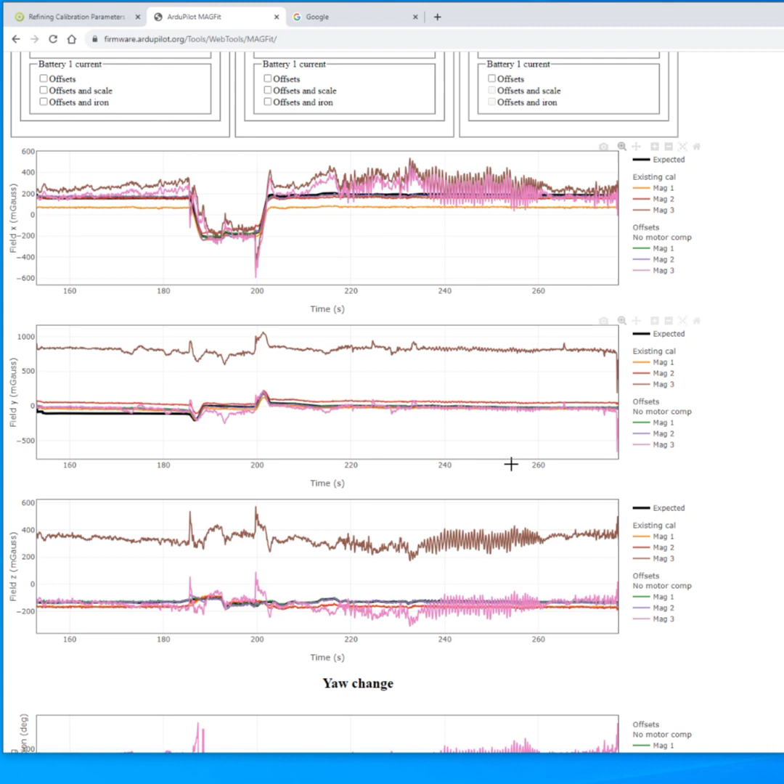So you can see we've got an external compass that we're using, second external compass that we're using, and then an internal compass that we're not using but is healthy. And you'll see there's lots of ticky boxes and some plots. So first of all, the plots. So we've got the field strength in X, in Y, and in Z. So this is the measured body frame magnetic field. And there's quite a lot going on here, so I think I'll just turn off some plots. Let's turn off these ones, much like the filter review tool, there's ticky boxes that you can go and tick.

So this is now just for the first compass. So you can see in black we've got an expected magnetic field, so it takes the vehicle's attitude and the vehicle's location and looks up the expected magnetic field in the world magnetic model. So that gives us this black expected line, and then the existing calibration here is in orange, so that's what the vehicle is flying on.

And then we've done a calibration here just using offsets, and that's in green. So by this fit, we've gone from the orange up to the green here. And you can see that's the same in X and Y and Z in all three axes. The green fits a little bit better than the orange. You see nicely on the line here. They're both a bit high to begin with, and then Z again, we're fitting reasonably well there.

So you can see the existing calibration, what we've come from, and then what we would get if we leave this offsets selected. Then there's a change in yaw. So this is if we were to go from the old calibration to the new calibration, what heading change would there be? And in this case, we're getting quite a big change, which suggests that the existing compass was perhaps having a bit of a bad time. So you can see 30 degrees change about through the whole flight.

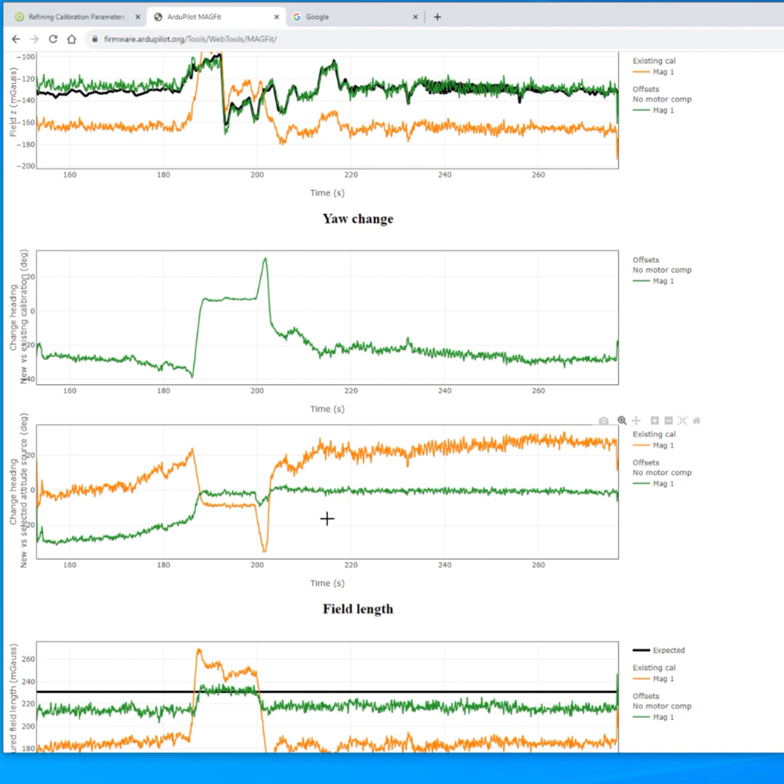So that's that, and then it plots the expected field length, so the sum of the x, y, and z axes is in black here, which of course doesn't matter what orientation you're at, the total length of the vector is the same. And again, you can see the new calibration has moved us up a little bit closer to that expected length. And then this is one of the available motor compensation sources. So in this case, it's battery current.

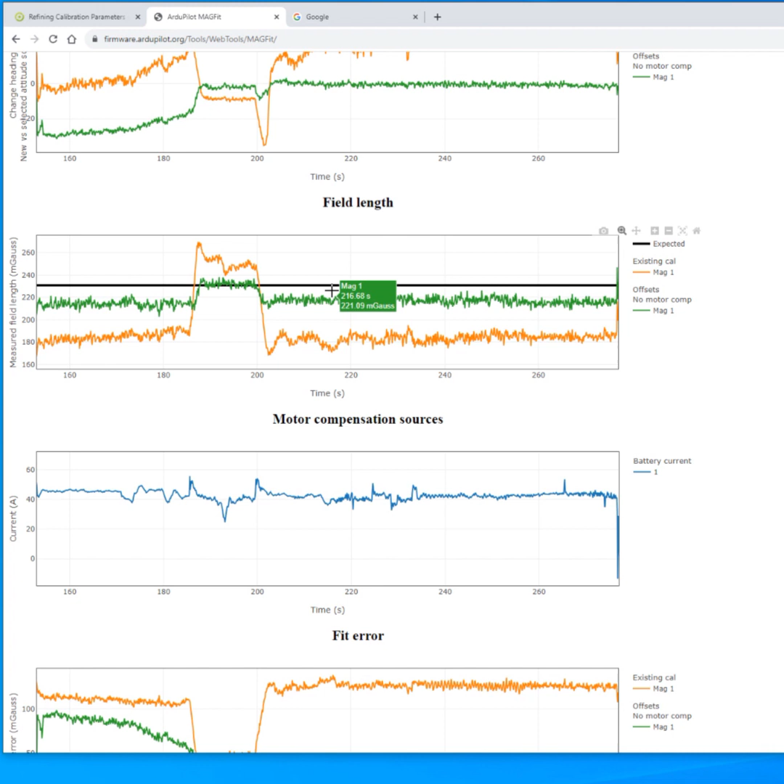And if we saw a big spike in this plot, perhaps here, where there's a spike in this length, we might go, oh, it would be worth switching on current calibration there. But in this plot, I can't really see there's any correlation between the error here and this source of interference. So it's probably not worth doing a battery current compensation on this particular log.

There's a fit error, so this is just how well it was able to fit throughout the duration of the log. You can see it was a bit worse at the beginning of the log, and then it's got quite a low error for the rest of the log. And then this sort of bar graph is just the area under this curve. So the existing calibration is a big number, and then the offset no motor compensation, which is the calibration we're looking at here, it's got a lower number, 31 is the error for that.

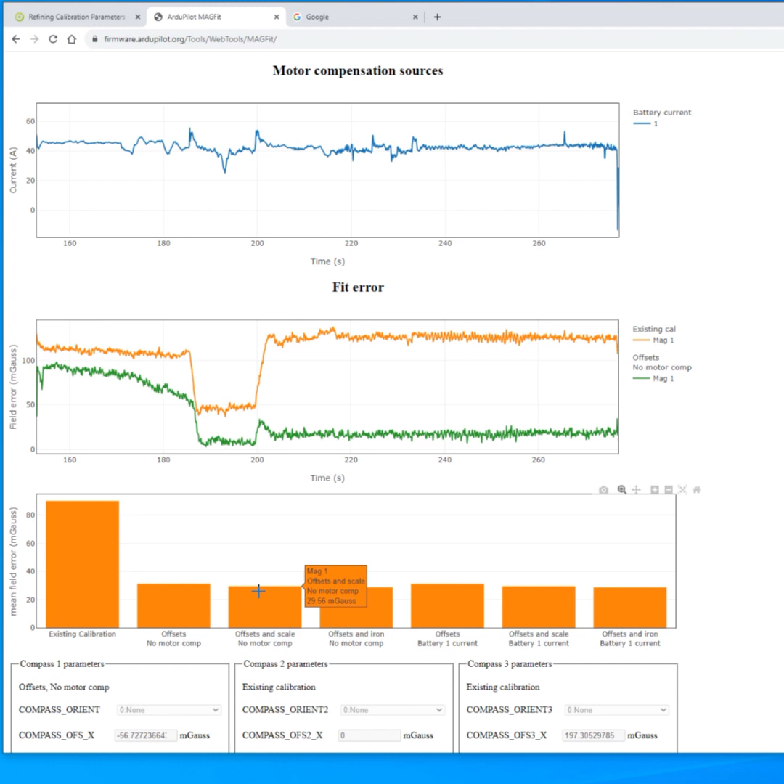And it also does a number of other calibrations. So if we go back to the top here, you can see all the other options in here. So we've done, in fact, 6 calibrations here, and you can pick which one you would like to use. And we see there's very little difference between all of these, which is a good sign if you can fit with the minimum possible number of parameters.

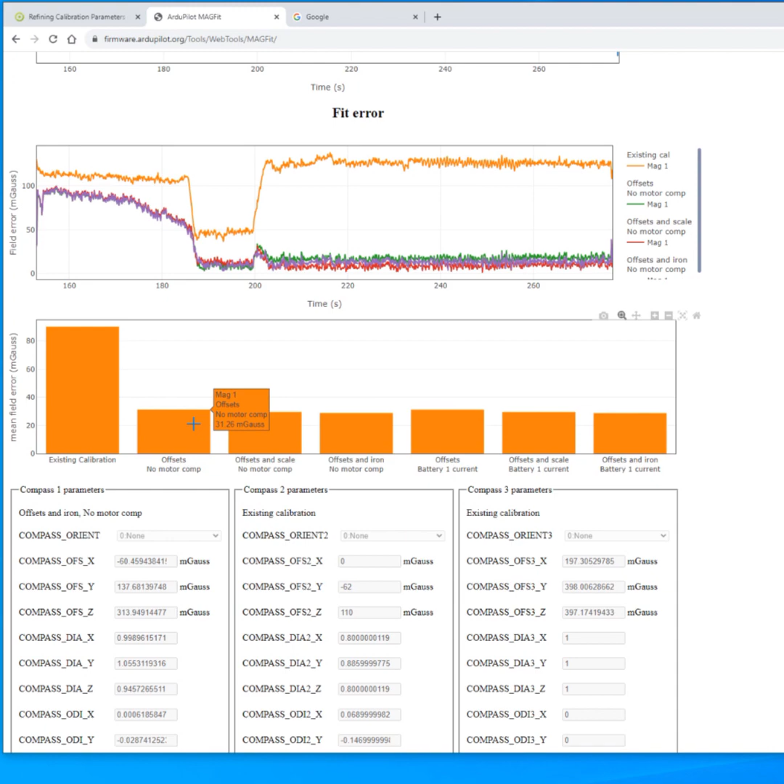So you can see that's reflected in these errors. So there's not any massive improvement here in fit by including extra parameters. So what we would probably do for this log is just leave it with just the offsets calibrated.

So that is that. If we go and look at perhaps this internal compass, first of all, you'll see I actually can't select some of these more complicated fits with a higher number of parameters. And that's because it did the fit, but the parameter values it got were nonsense. So it said, I tried to calibrate it, but I can't. So you actually can't select those ones. So we just get the offsets here. So that's just bringing the individual axes in line.

The increased parameter fits add a scale factor, so that just scales all the vectors, and then the offsets and iron does the hard and soft iron compensation matrix.

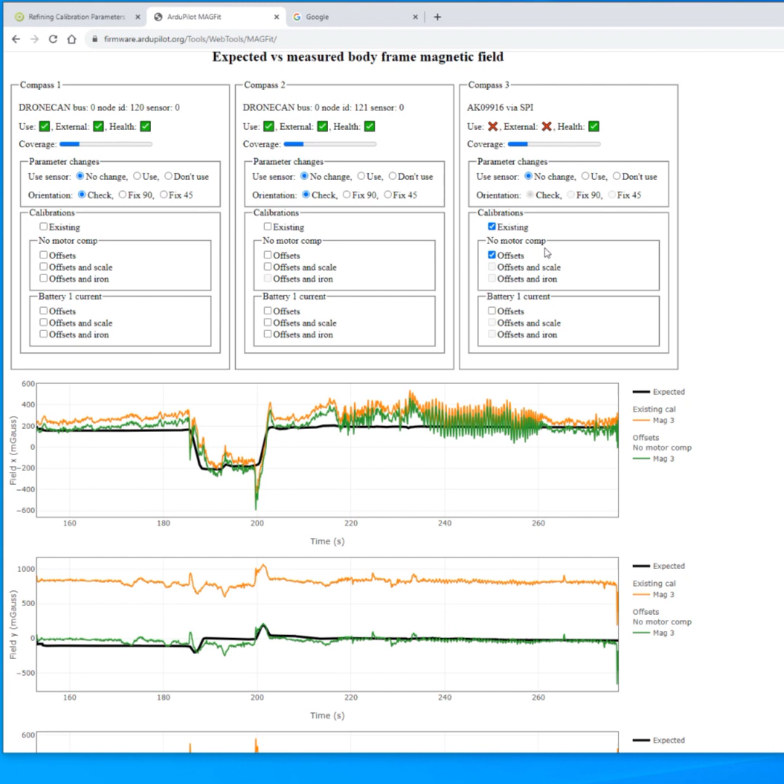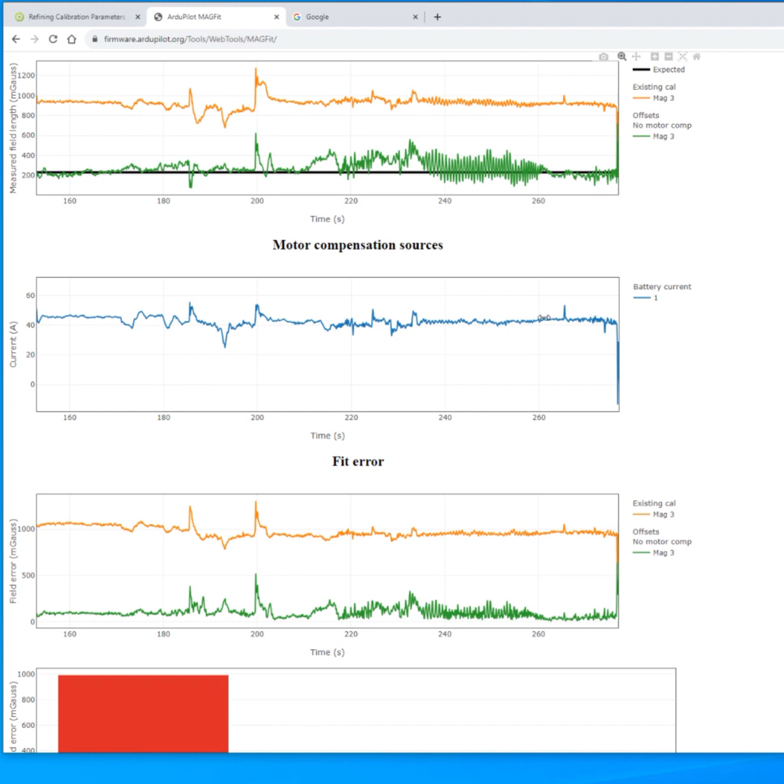So on this compass, I thought we might see a little bit more correlation between the error and the battery current here, right? And I think if we zoom in here, you can see all spikes here up and down. So on this internal compass, and certainly at the beginning and end, it's really clear. You can see it spikes up, follows current quite closely, and then drops down again. So it's extremely clear on this internal compass that there's a very strong interference from the battery current here.

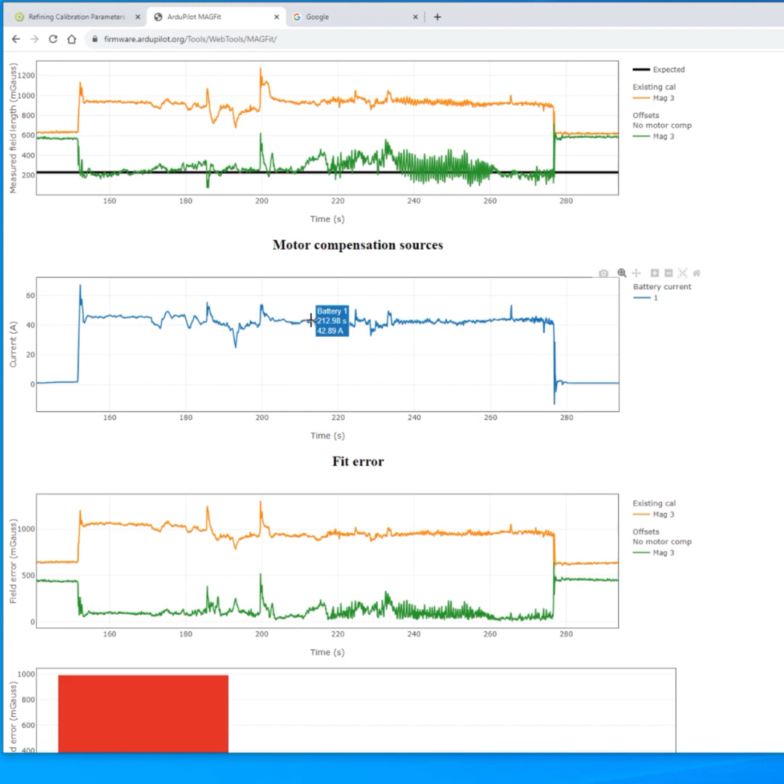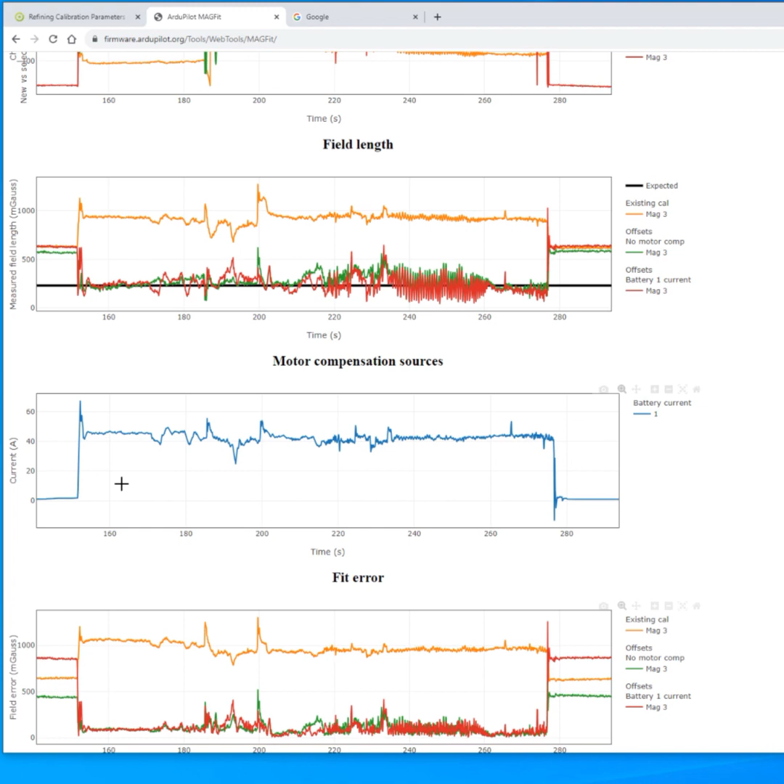So we can select a fit with battery current compensation. And you can see that's done a little bit better. So we've gone from big error at the beginning of the flight to a bit less error in the middle, but it's still really not an acceptable compass to use. You can see we got about 30 on the external compass as the error for the whole flight, and here we're getting 150. So even with the current compensation, still not a good idea to use this third compass. So whoever set this up was correct in not using that compass.

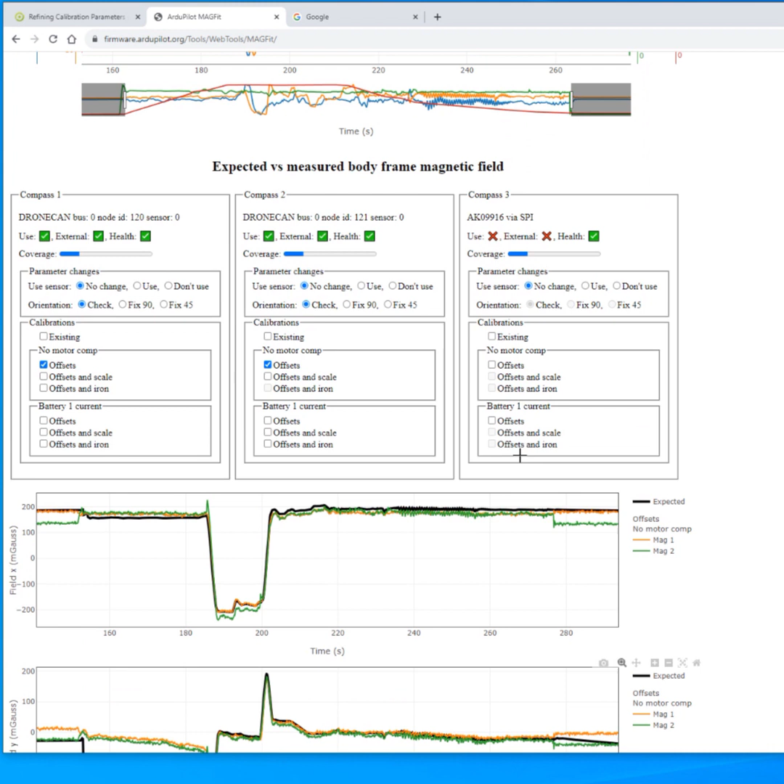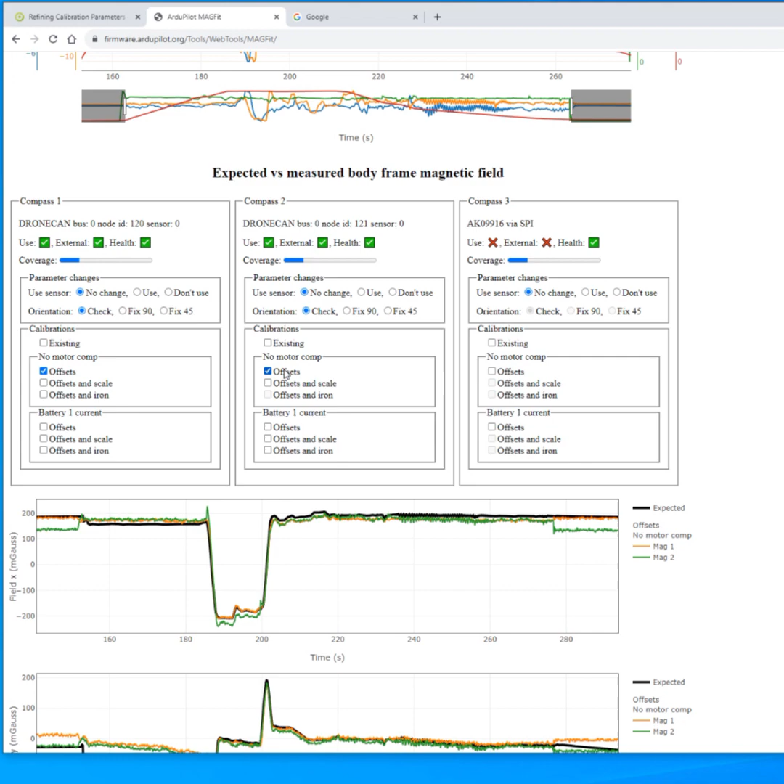So we would continue using these first two, I think, in this particular log. So I've selected offsets here. We haven't actually selected this third compass at all. So because these are the last two I had ticked in this box, if we now go right to the bottom, you'll see it's populated those calibrations in the little parameter display here.

So you can't change these numbers. These are just from the calibrations. And it says here what it is that it's displaying. So this is the offset calibration. There's no motor compensation, which is the same for compass 1 and 2. And then it's actually the existing calibration. We haven't got anything selected for the third compass. So if I hit save parameters, it's telling you what it saved. It saved compass 1 offsets, no motor compensation, compass 2 offsets, no motor compensation. I hit OK. It's downloaded a file, and that's our parameters.

So it's got the offsets, the diagonals are 1, the off diagonals are all 0, no motor compensation, scale of 1, compass orientations there. And you can see the same for the second compass, and we've turned off the global motor compensation parameter. So you could then just take these params and load them onto your flight controller, and that would be your compass calibrated from this MAGFit.

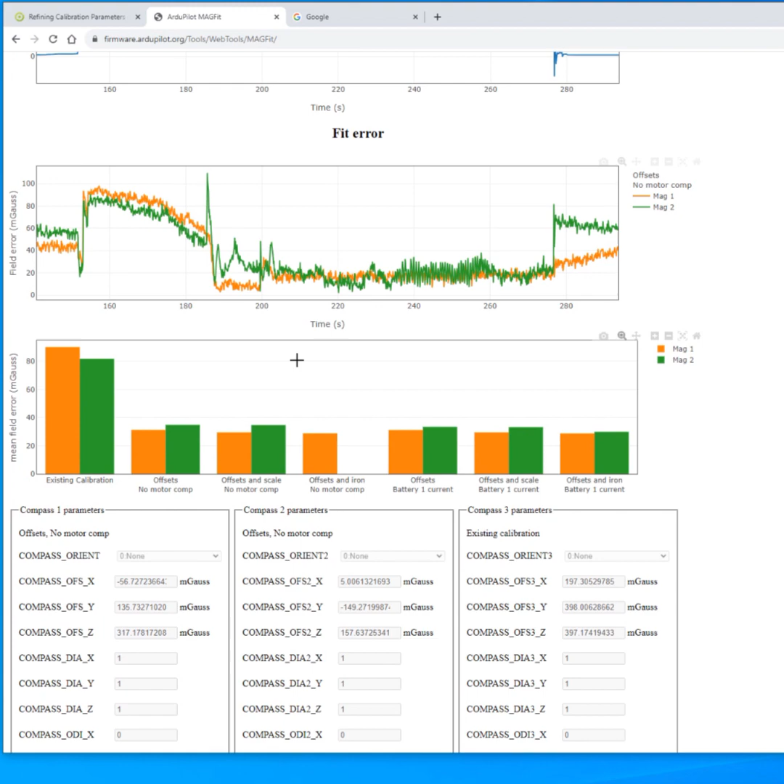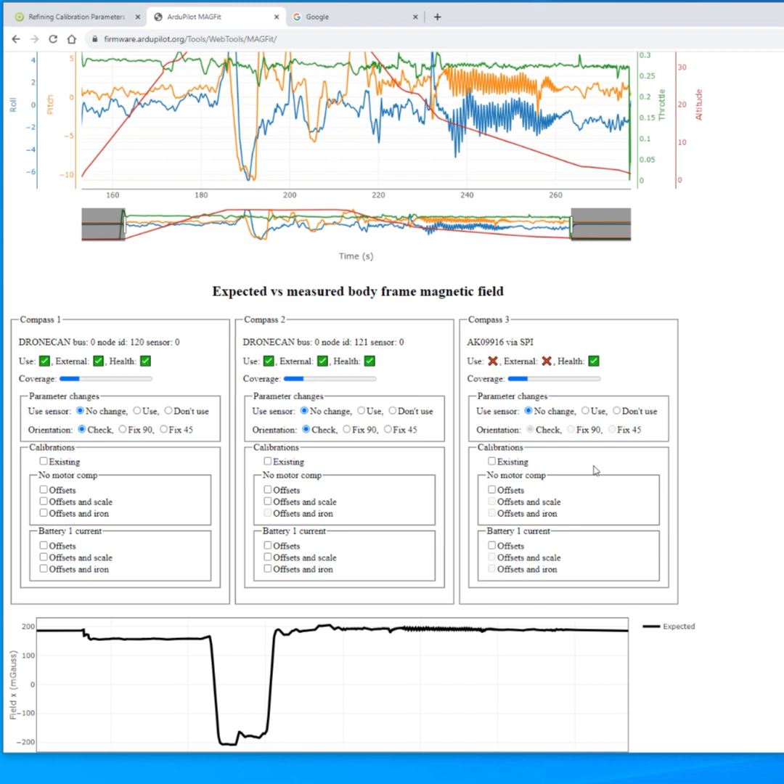So that's a basic overview. I think the key thing is you don't want to rush into the really complicated motor compensation and scale and iron correction if there's no real benefit. So let's have a look at another log, and we'll have a look at some more of these options here. So let's clear that, and then let's have a look at this long flight here. It's a bit of a longer log, so it's going to take a little while to load.

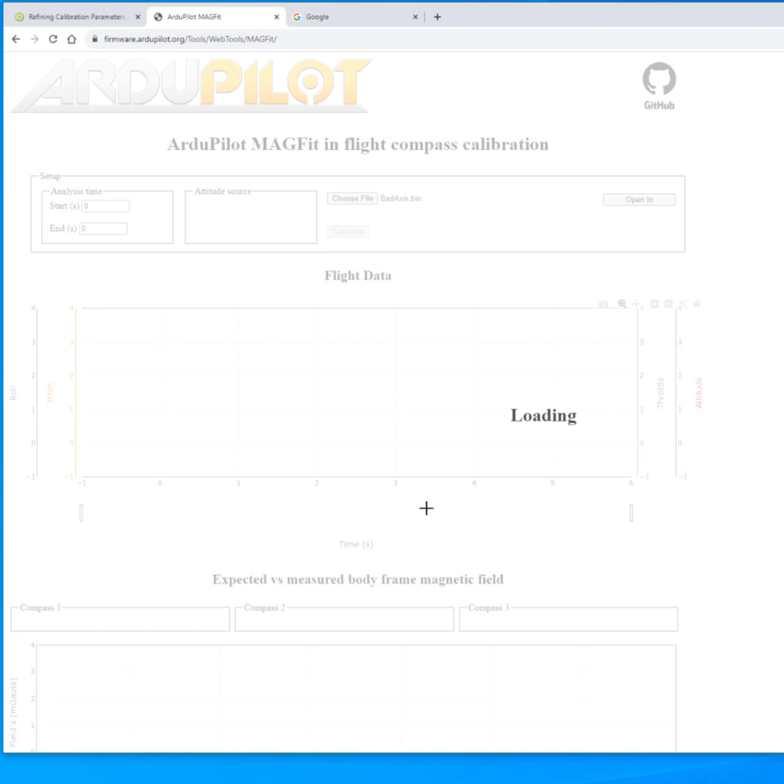So you'll notice it says MAG1 possible incorrect orientation, 0 none, should be 12, pitch 180. And it says it's got a cost ratio of 4.8. So that means that this pitch 180 rotation is 4.8 times better than the next orientation. So we're just going to say okay, and it will carry on.

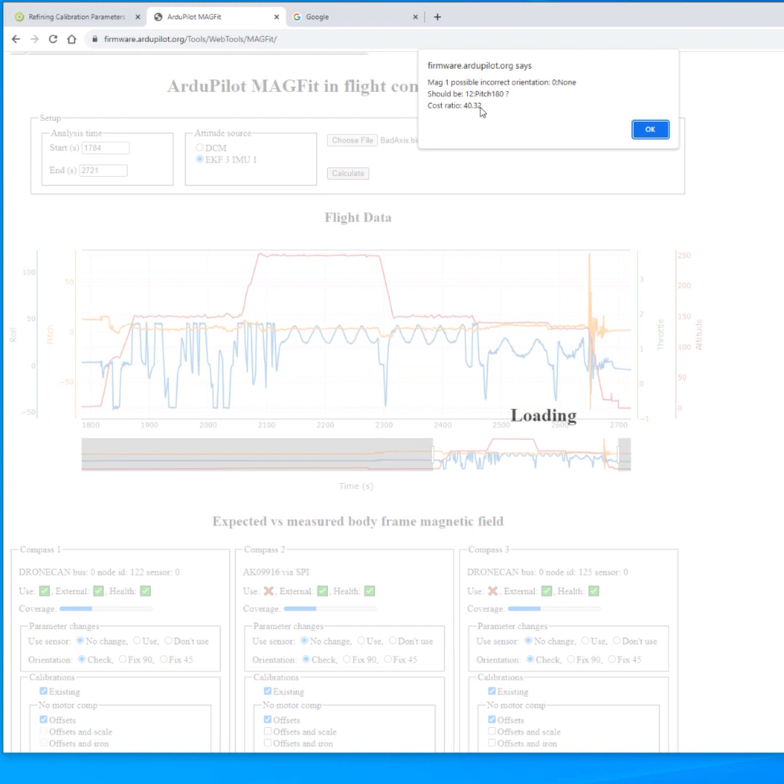So in this particular log, I think it had disarmed logging turned on. So there's a big long chunk at the beginning of the log. So we'll just zoom into the end here, and I'm just going to recalculate. And again, it's warned us the same warning. But now we've excluded that beginning of the log. You'll see this cost has gone up to 40 times. So it's really very sure that this pitch 180 orientation is correct.

And we can go and look. I'll just turn off the second and third compass here, just so there's a bit less going on, and we'll turn off the calibration. So it's very clear here that the lines are not even close to matching. They're actually going completely the wrong way in the x-axis, y looks okay, and then the z-axis is wrong. So it's very clear something's wacky here. So what we can do is this little parameter changes box.

So under orientation at the moment, check is selected, which is what is selected by default, which means it warns us. And it said pitch 180. So if we select fix 90, it will fix to the closest 90-degree orientation. Obviously you've fitted your compass to the vehicle, and you know if it's a multiple of 90; if it isn't a multiple of 90, you can let it fix to one of the 45-degree rotations. But in this case, we know it was 90 degrees, so we're going to hit fix 90.

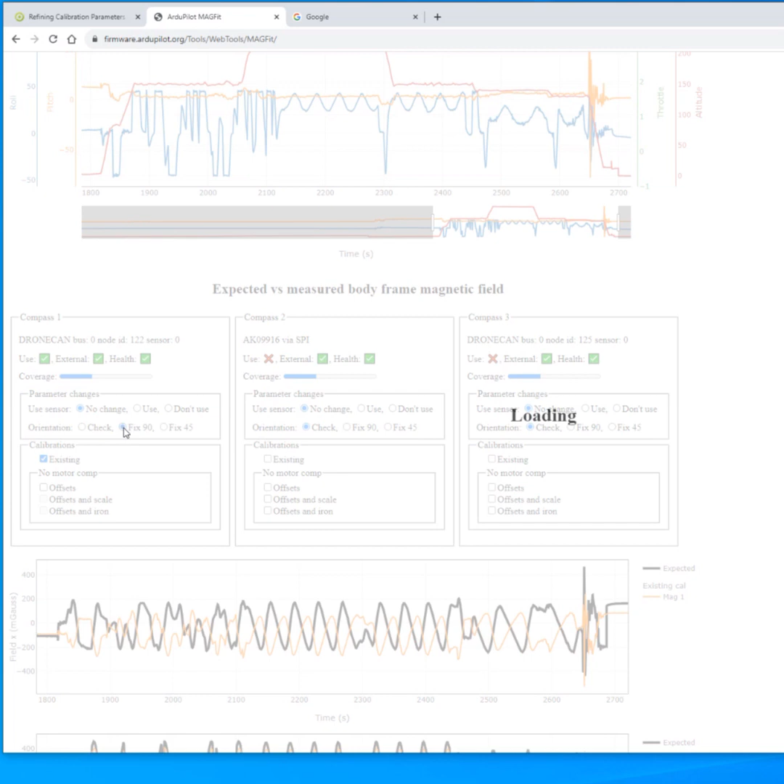It's going to run again. And now you'll see, of course, the existing calibration is the same. It's still got the wrong orientation. But if I just turn that off, and we'll turn off the other two compasses as well, you can now see by fixing that orientation, it's been able to nicely line up the X, Y, and Z. So it can fix orientations for you.

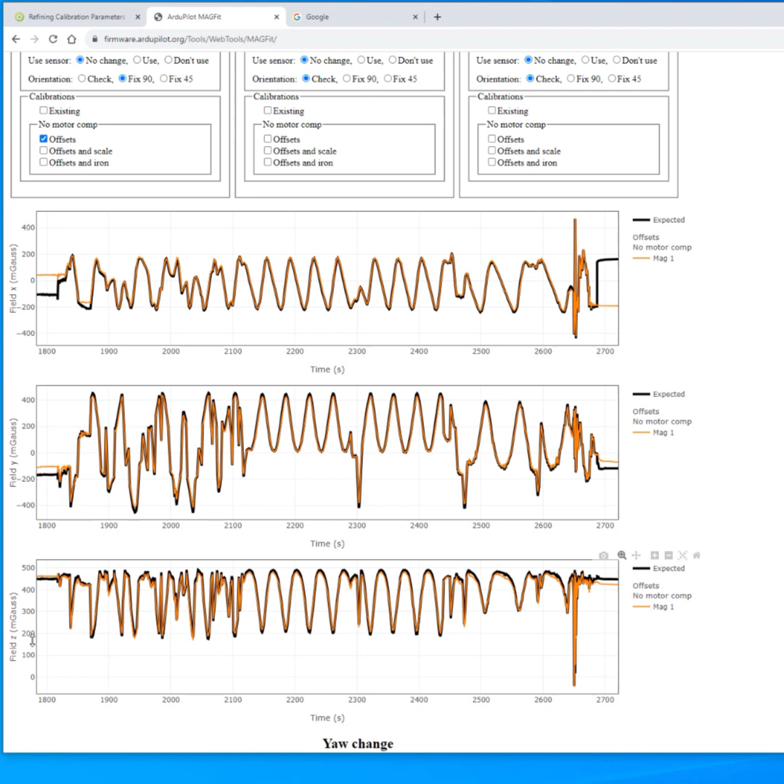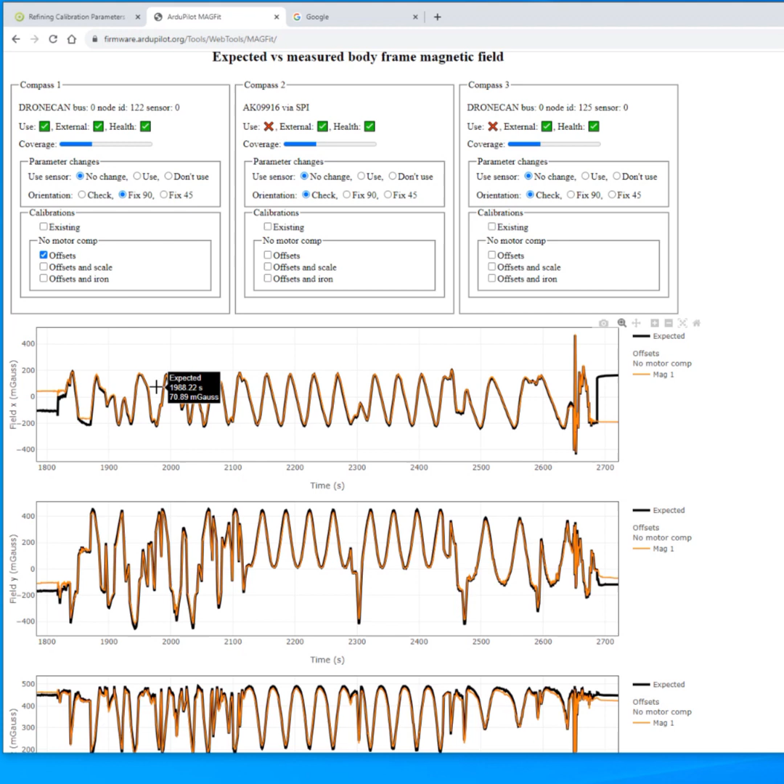Having said that, if you are flying the vehicle, this was quite a dodgy flight because it had the incorrect orientation. So if you're not sure, what you can do is fit the compass, but you don't select use. So it won't use the compass which you're not sure of the orientation. And of course, you do actually have to fly for this MAGFit, although the built-in compass calibrations will also correct orientations for you. So if you're not going to fly, you could just do an on-the-ground compass calibration.

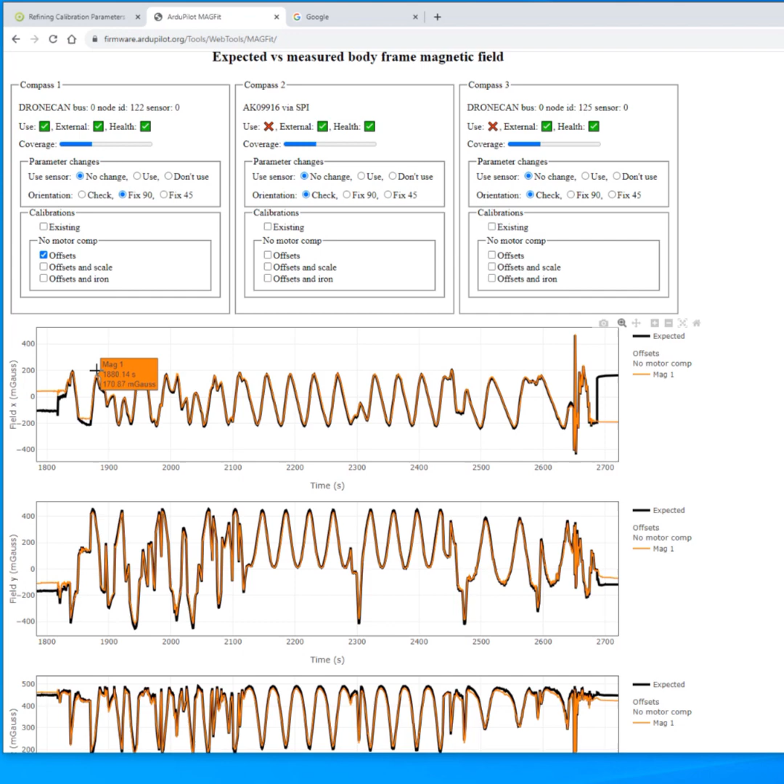So in this particular case, you can see it's fixed the orientation. It's got a much better calibration. Now, there's an extremely big change in yaw, and that's not because the new calibration is rubbish. That's because the old calibration was rubbish. So that's why we get this massive change in yaw here, and we know that the compass had the wrong orientation. So we go, oh, that's okay.

And you can see that because of that, the existing calibration in orange here also greatly disagreed with what the EKF thought it should be. And our new calibration is much better, within maybe 10 degrees. So again, that's another confirmation that the calibration is correct. And again, the field length was just all over the place. In this particular log, there was no current monitoring, so there's no compensation source. So we can't look at that sort of correlation there.

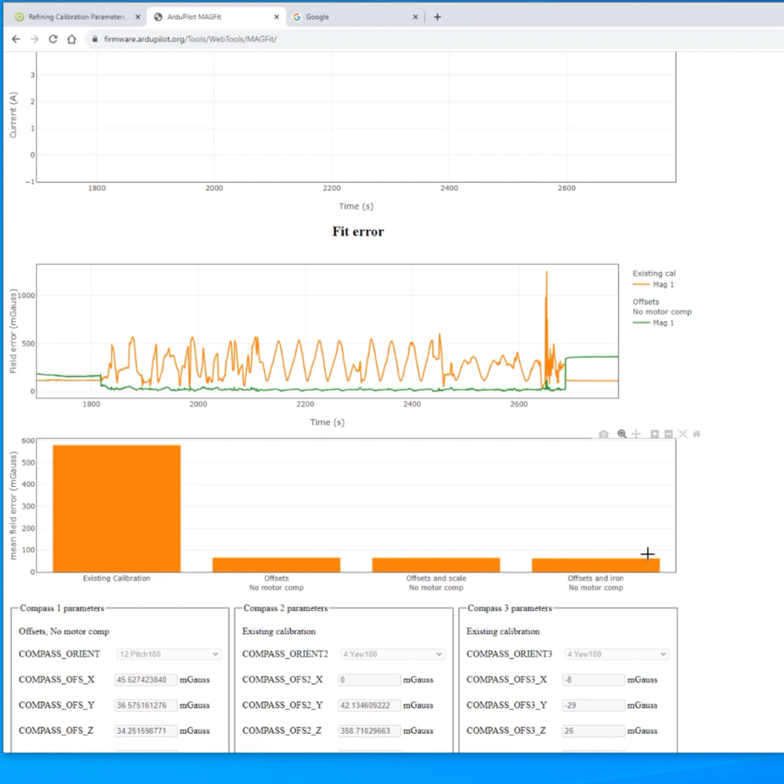And again, this is fit error, and we know that compass was completely wrong. And again, this is a log where we get about the same, even if we include the more complex dimensions in the fit. So probably here we would just set offsets. There's no significant improvement by including the extra parameters there. And I will also add that the length of the log shouldn't matter for these comparisons.

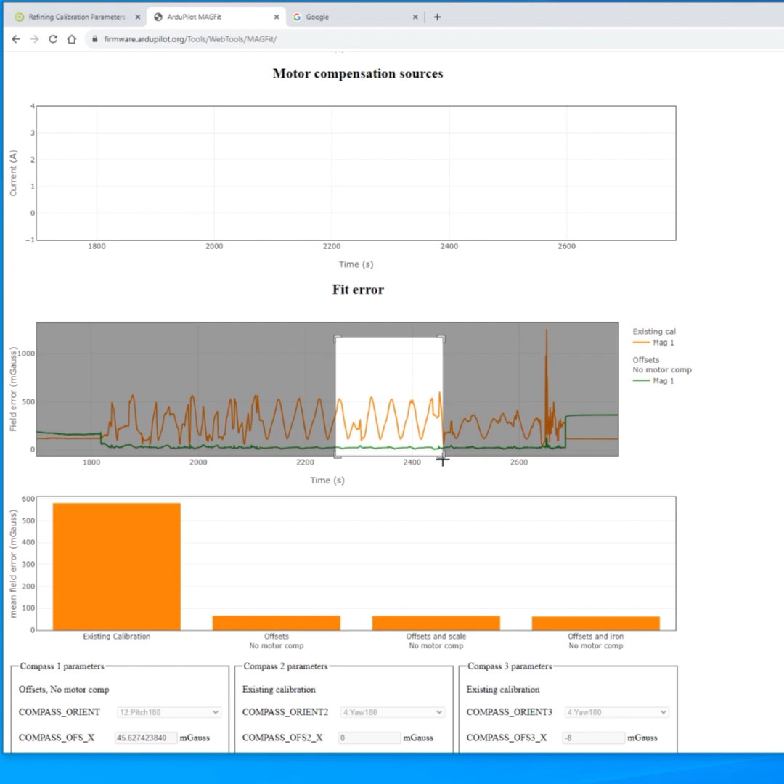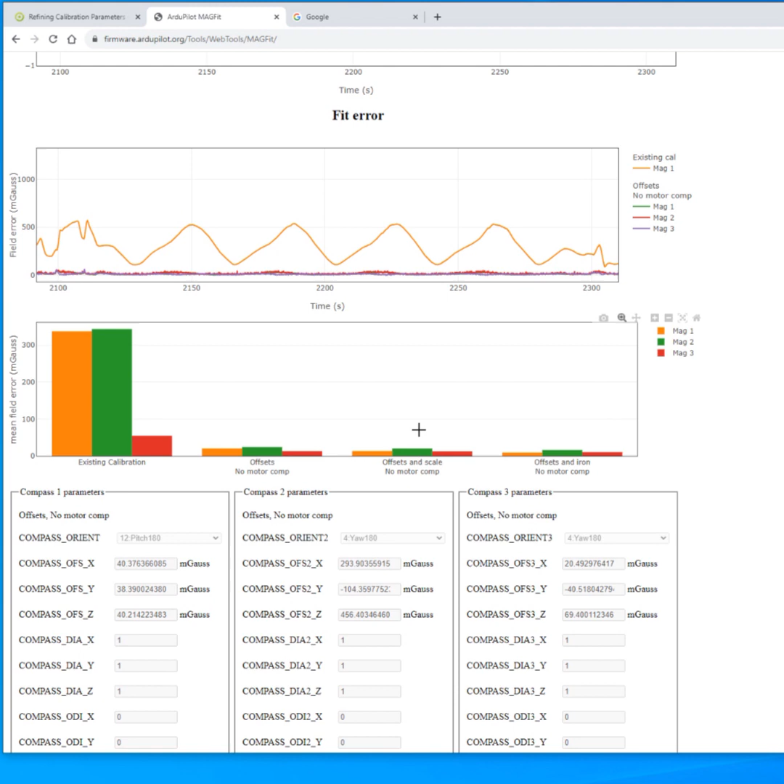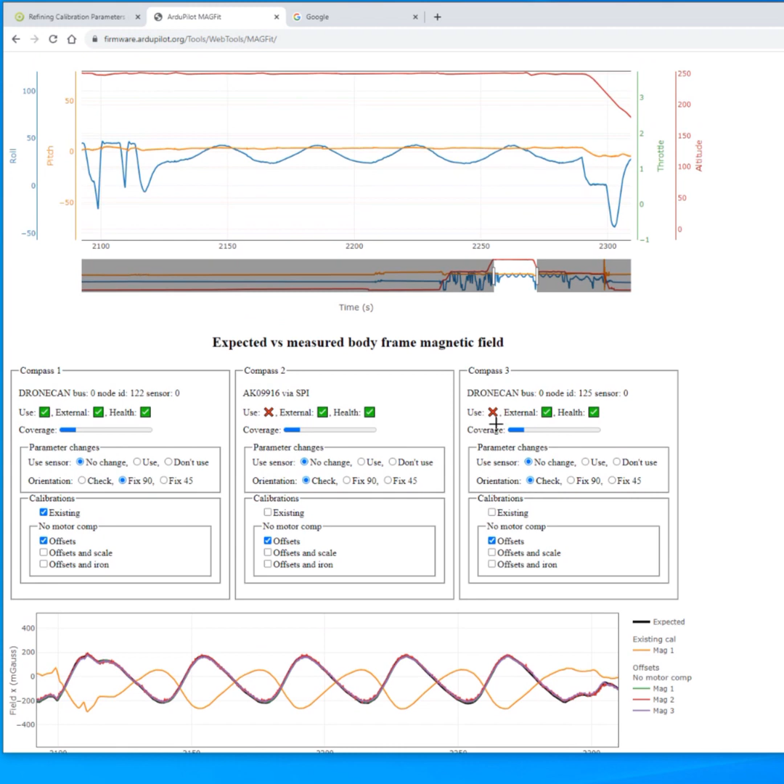So if we go to the top and zoom in a little bit, the error score should still be equivalent. Let's see, so it's a bit lower now. I mean, it's a bit hard to say. So it should still be comparable between flights, roughly, because it is normalized by the length of the sample. So that's that. Let's just go back to the beginning of the flight.

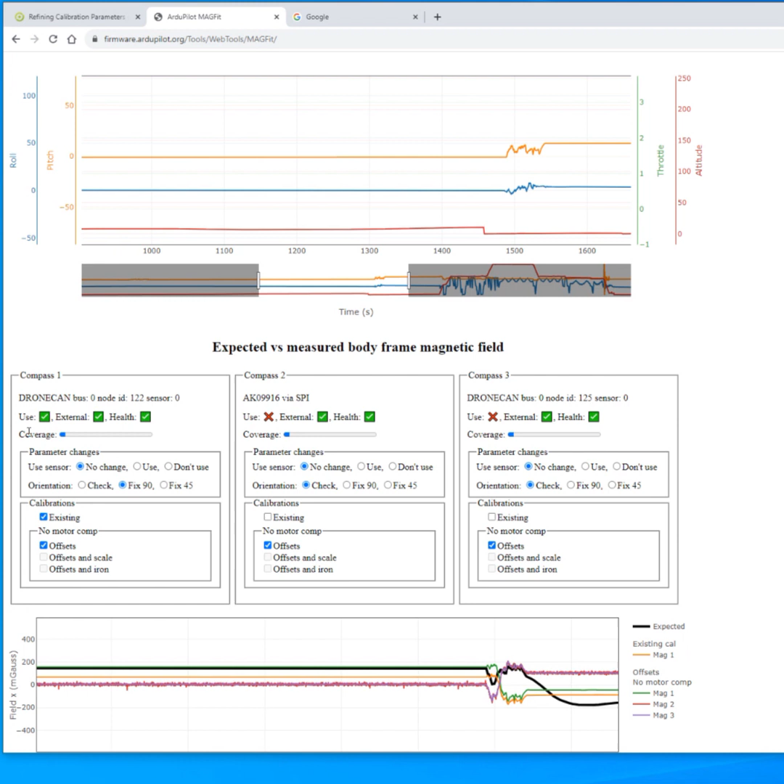If we hit calculate here, you'll notice this coverage bar. So we get a very low score in coverage. This coverage is trying to give you an indication of how good a flight it was for a MAGFit. So how many of the possible orientations did the flight hit? If we're just looking at the beginning of the flight where there's no movement, you'll see it gets a very low score. And we get obviously the same score on all compasses in this case.

But if we include a bit of the flight where there's actually some flying and we hit calculate again, you'll see that coverage score has gone up. And if we include the rest, we should see it gets a bit bigger again. So this is quite a good coverage. Now it is all possible orientations, and so that includes upside down and things like that. So you're probably on a flight not actually going to get more than maybe 40%.

This is actually one of the reasons why the compass calibration on the ground usually works really well, because you have to get 100%. It will not complete until you've done lots of orientations, including upside down. But in this case, from an actual flight, we're not expecting the upside down orientations unless you're a very ambitious flyer or you're flying acro or something. So we get 40%. But if you're struggling to get good results, or you've done a MAGFit and it was no better, it might just be because you had quite bad coverage if you didn't fly at enough orientations.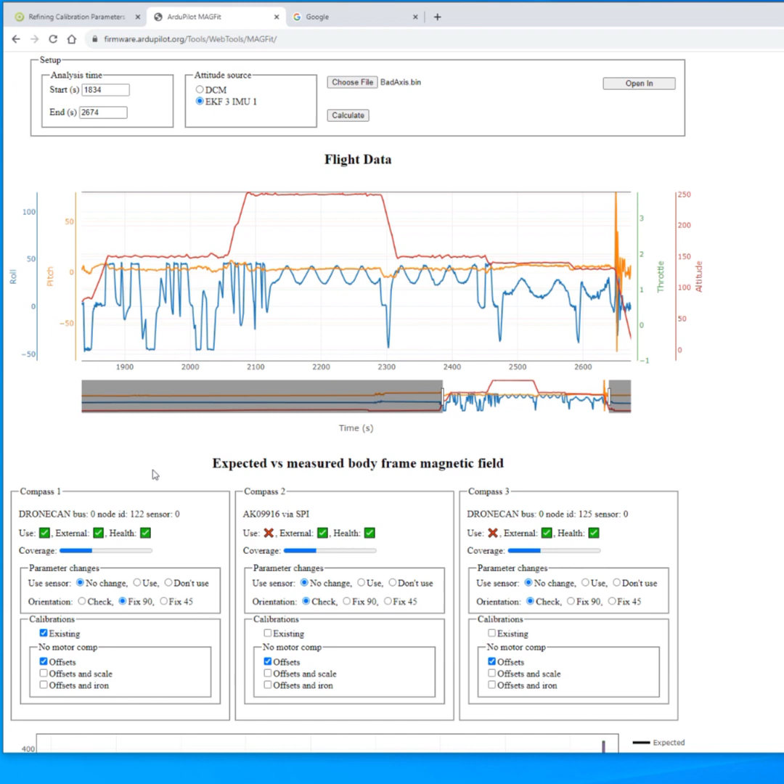And of course, you don't have to do a dedicated flight if you're having compass issues. You can run it through this tool. You probably wouldn't use the calibration parameters unless you'd done a dedicated flight, but it can also be used to sort of evaluate how the compass was doing.

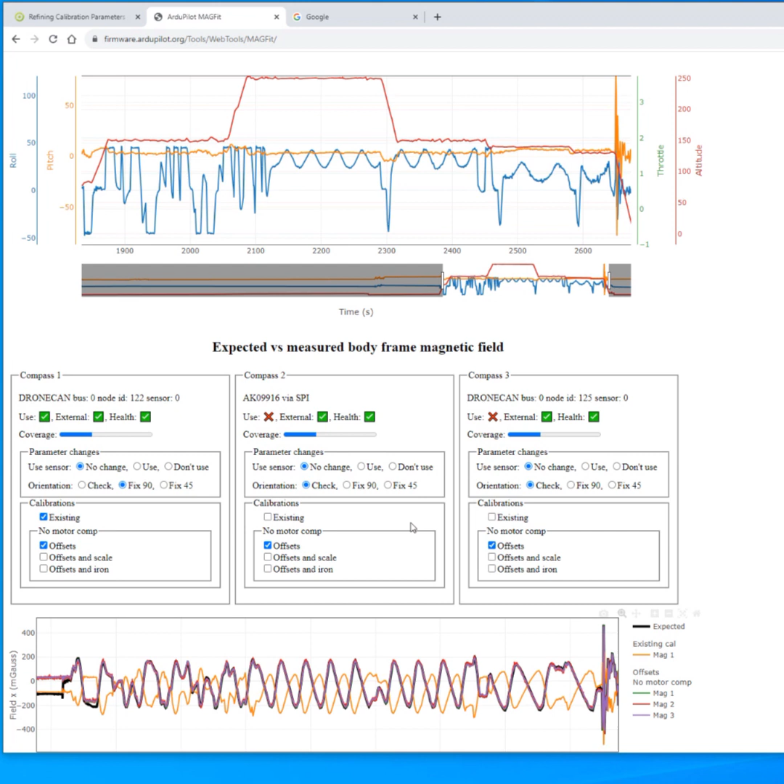So let's see. So we've covered the orientation fix, check fix 45, and it will warn you with that little pop-up before it does an orientation change. So there's also this use selection here. So if we had a log and it was using a compass and we come to do the fit and go, oh, that compass really is terrible, you can actually override it to don't use.

And often it's quite nice to calibrate the compass that you're not using, but still don't use it, because then you can still use it as a point of comparison, even if you know it's not a good idea to fly on that compass. And likewise, if you had a compass that was previously set to not use, for example, one you didn't know the orientation of, you could then say, oh, I want to use it now. I've fixed the orientation. I've looked at the calibration. It's good. We can now start using that.

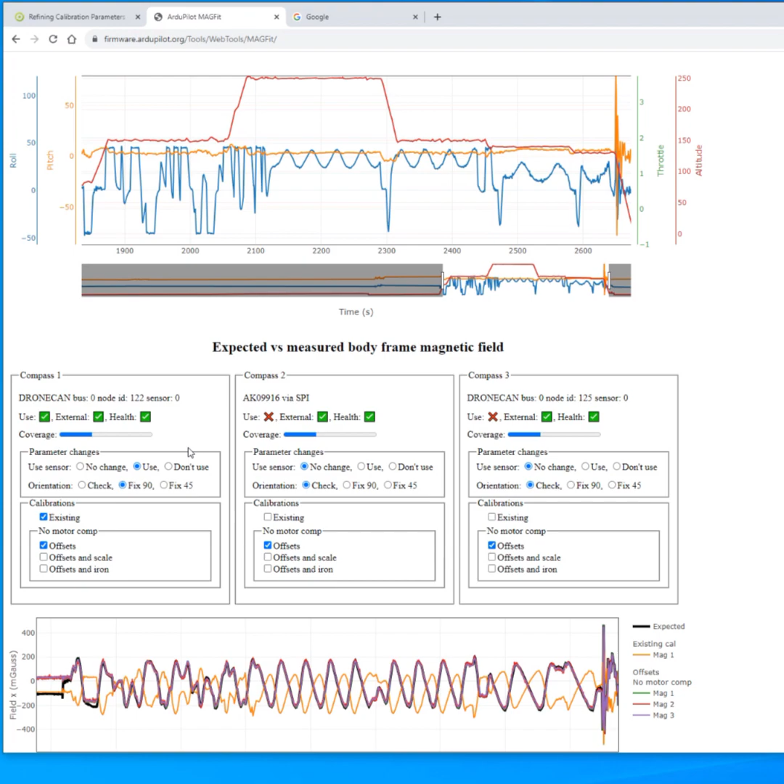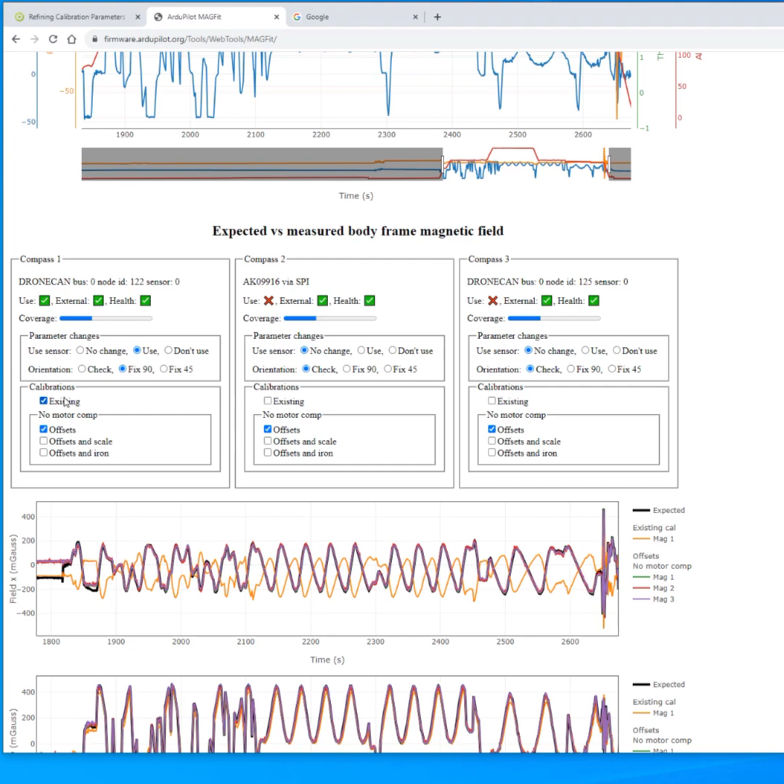And of course, by default, it says no change, which just means the use parameter will not be in the saved param set. So let's again go to the bottom and have a look at what this param set looks like. Again, it's telling us what the calibrations were. And I don't think I haven't got any selected, so it's not letting me save. Whoops. Let's turn off that. Is that going to let me save? No. Still a little bit of a work in progress, this tool, I'm afraid.

We didn't hit calculate, that's why. So because I had changed the time window here, you see I need to come up and hit recalculate. So let's go back to that. And that's set to use, and then we'll be able to save now, save params. So it warns you again that it's changed that orientation. And then it tells you again what it's saved.

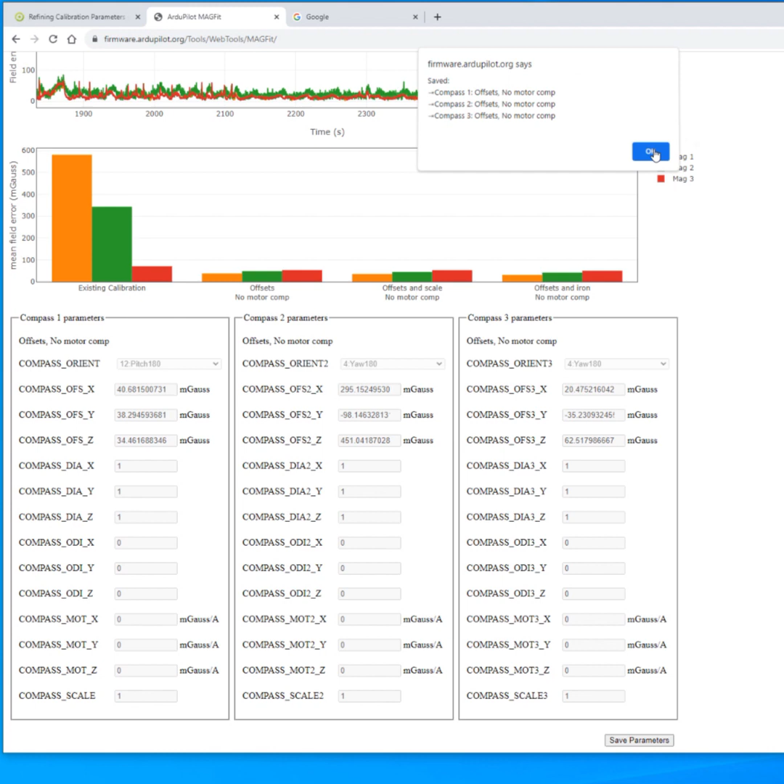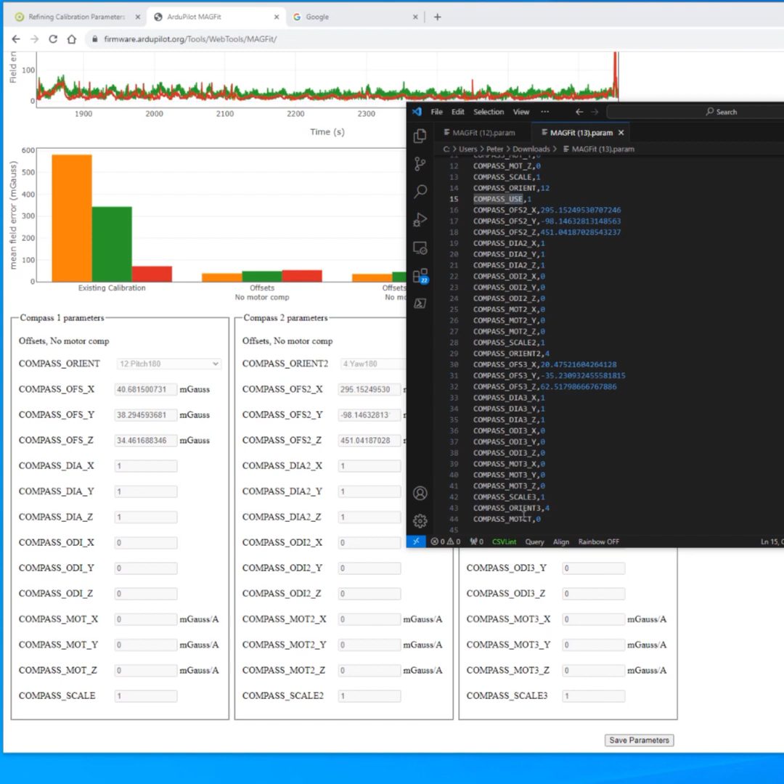So we've saved our 3 calibrations for our 3 compasses, no motor compensation, and again, it's downloaded a parameter file. And now you'll find, because we had selected, yes, we want to use that first compass, it's got the compass use parameter in here for the first one, but you'll see there's no compass use parameter in here for the other 2 compasses. So that's that.

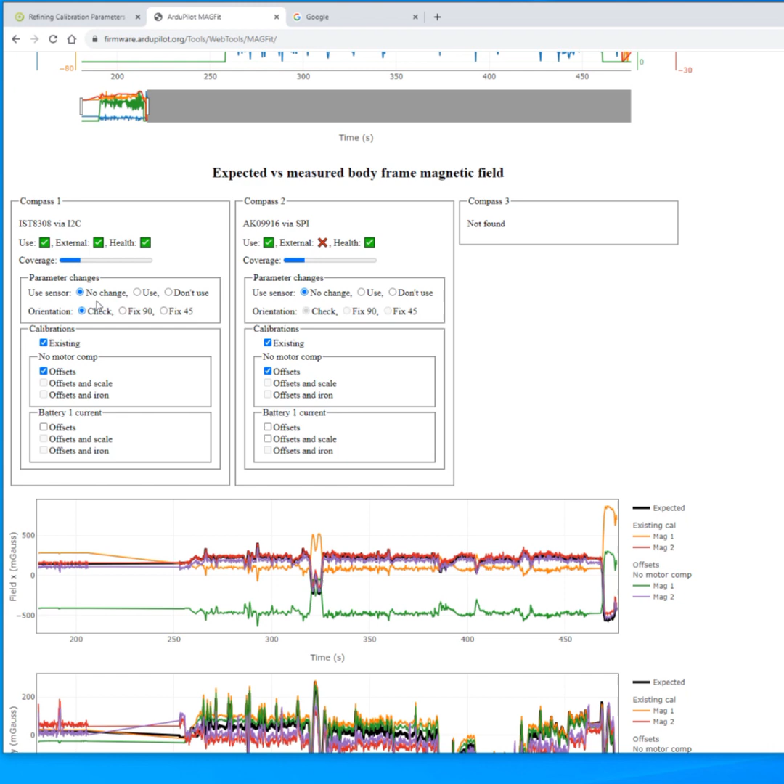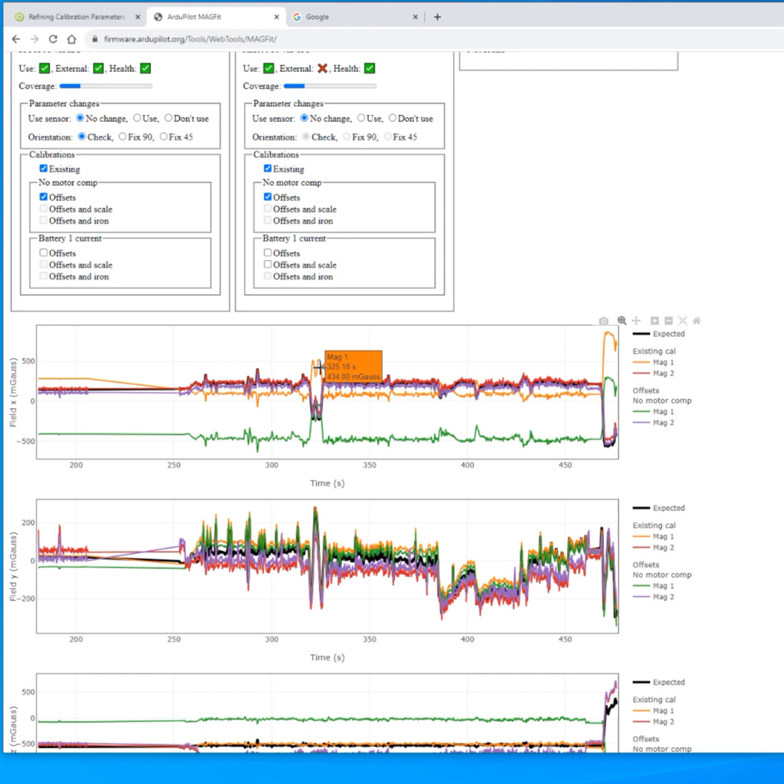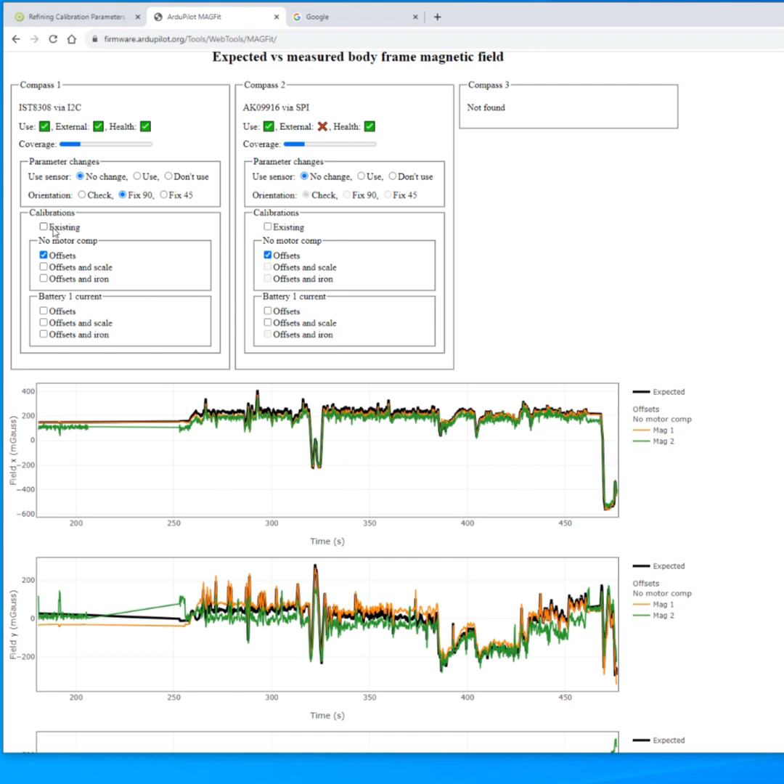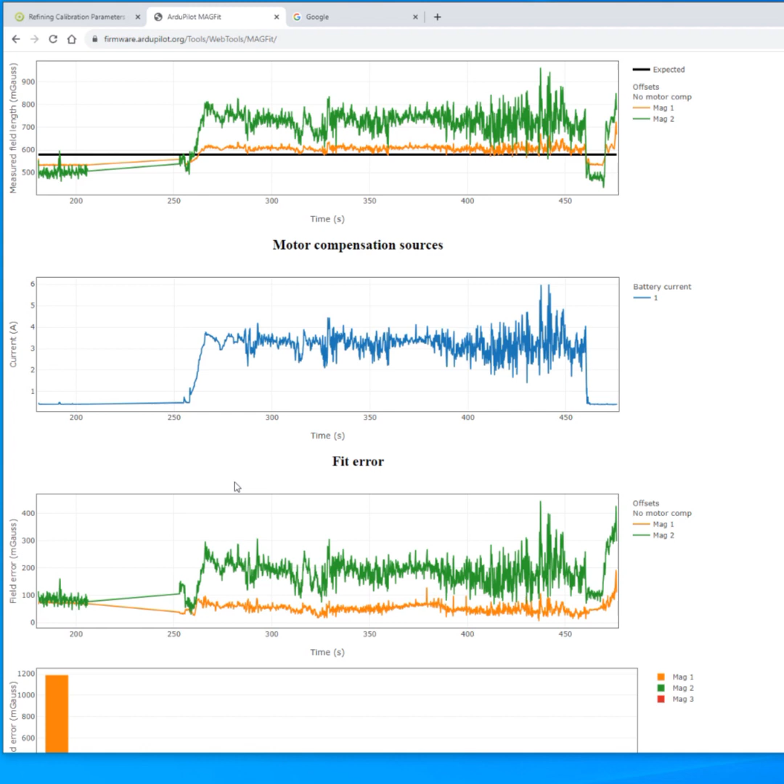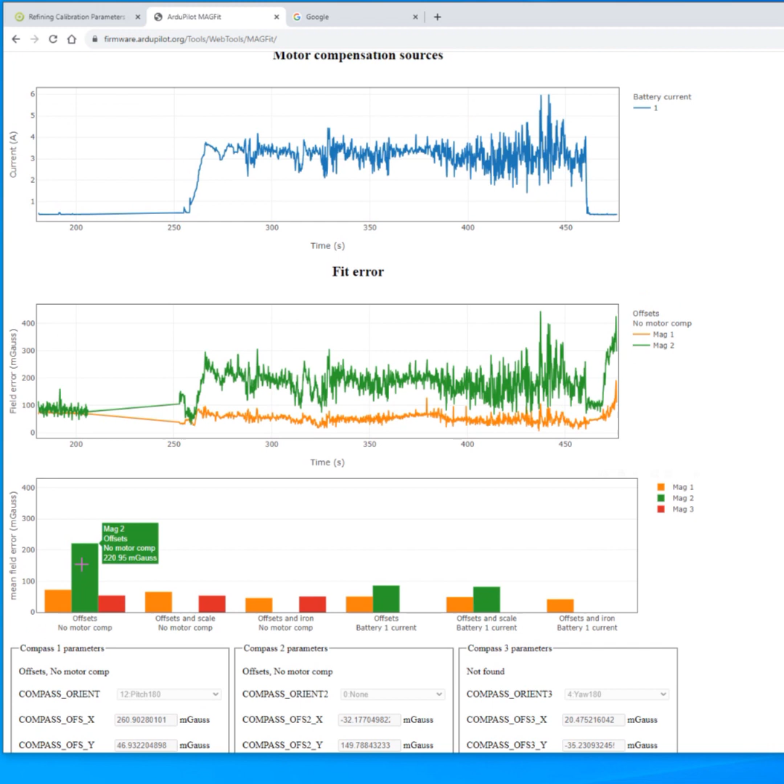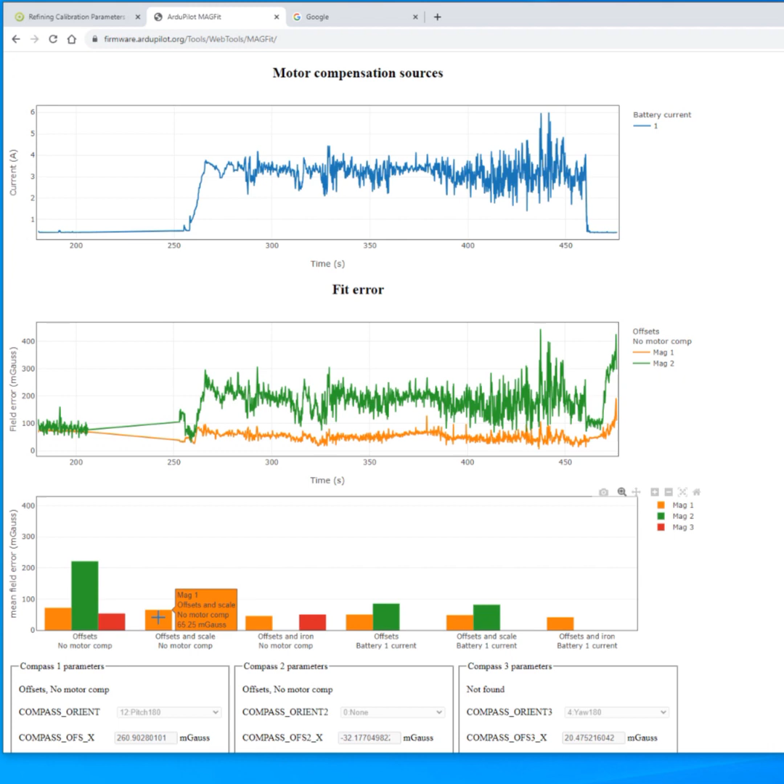So yeah, that's MAGFit. Hopefully you get just as good results as you can currently get with the MAVExplorer tool, but it should be a little bit easier to run. And also, because it can do all these calibrations in one go, you can easily compare the different calibrations if you want to include those extra parameters or not, and especially for the current compensation. Unfortunately, I don't have any example logs where they really need a lot of current compensation.

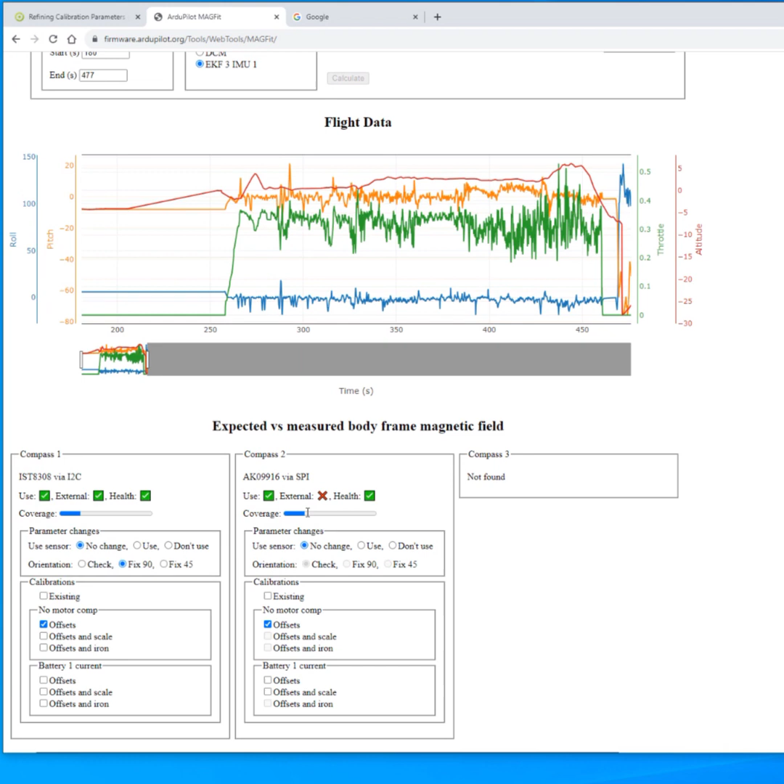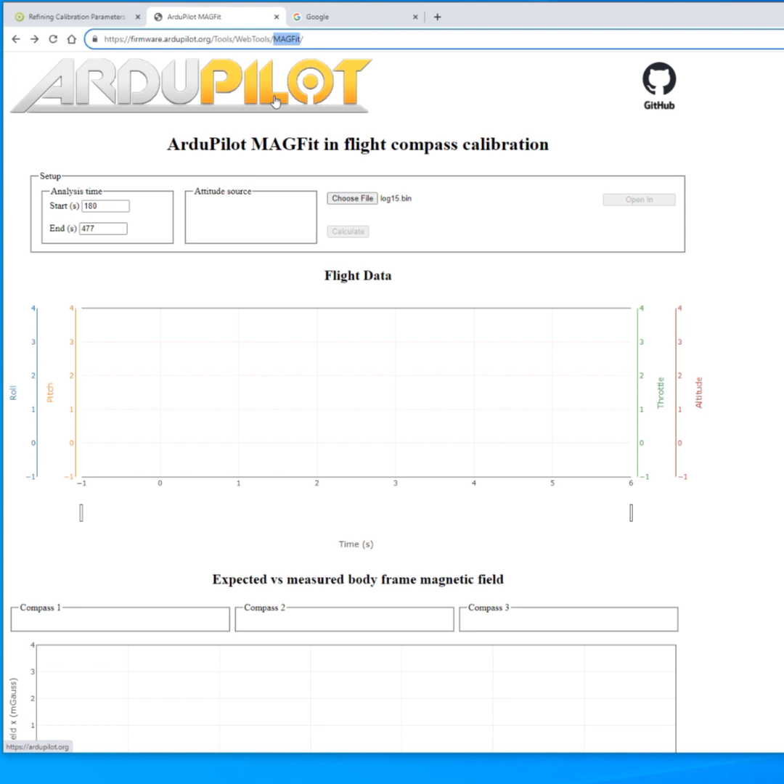So yeah, that's the new MAGFit tool. Again, it's only been live for a few days, so there could still be a few issues to work out as ever. If you do find a bug, there's the little GitHub button up here. Hit the GitHub button, navigate over to issues, and create an issue, and tell us what went wrong, and upload the log. And of course, we've got the new WebTools landing page, so go and have a play with some of the other web tools.